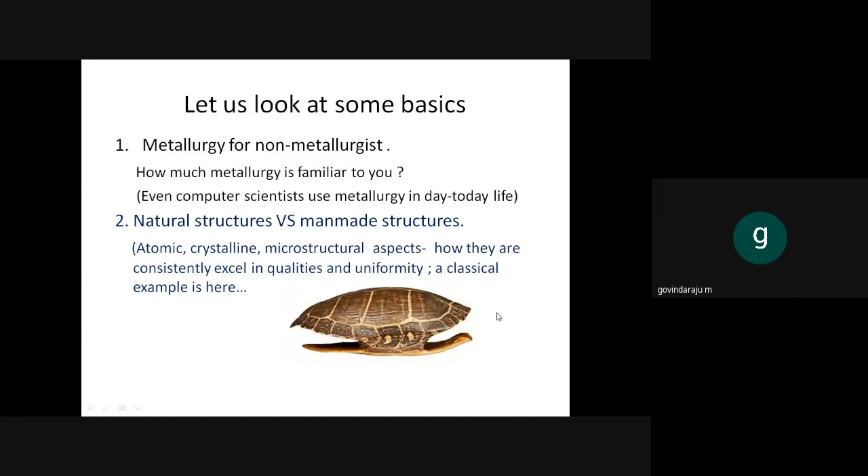If you look at them, for thousands of years they don't have any deviation in their properties, and their repetition is perfect. As these two are perfect, automatically their quality is perfect. Whereas, for example, if you make a material for an aircraft, composite or non-composite, 60% of the money is spent on testing. You have to make sure that every batch, every piece, every part is tested, proved, and clarified. If not, it is not fit for flying. Why so many irregularities? Because we have to start from the atomic level, and once perfection is attained, our material also will compete with natural materials.

And some of the words we might have seen, for example, in the last 15 or 20 years, everything used to be nanotechnology, nano-based. Let us start our research in nano, that used to be the buzzword. It's almost settled now. But is it anything new? Are we not using any nanomaterials? We are using nanomaterials in day-to-day life. You are using, I'm also using. So we will come to that: what nanomaterials do we use? Nanostructures, nano coatings. Is there any example right now?

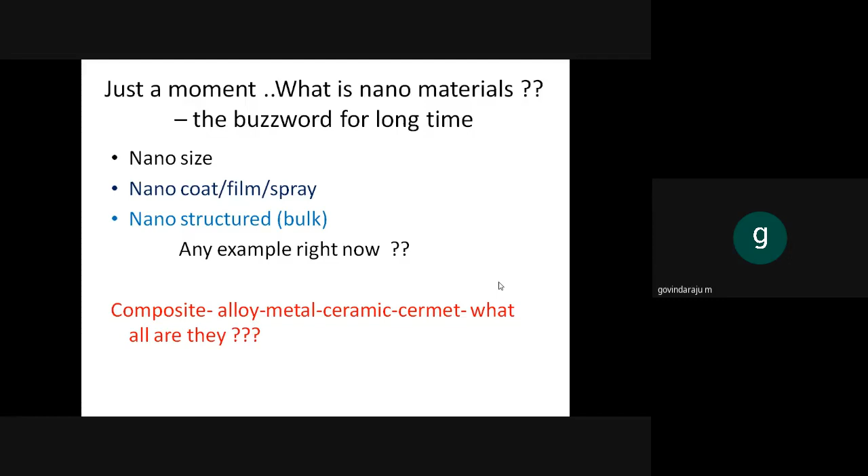Yes, take your SIM card or any electronic gadget. It has a nano coating, nano gold coating on the structure. Hope you know why it is gold coated and why it is nano gold. One is for a technical reason, another is for a commercial reason. Why it is nano size is for commercial reasons. So are we not using any composite or metallic ceramic? Yes, we are using. What exactly is a carbide tool? That also we'll see. A carbide tool doesn't mean it is only carbide. It is a composite, a perfect case study and example of a metal matrix composite.

A few more nanomaterials. Why are we talking about these particular materials? Because they are part and parcel of composites. When we talk about composites, we are talking about matrices and reinforcements. Sometimes we call reinforcements fibers, and we are not worried about fillers and other things for the time being. So let us talk about the matrix. Anyway, it is a large structure, we know it. And now let us talk about the fibers or reinforcement.

If you take just a simple example, a braided garden hose, which is available in most houses, not the plain polymer hose. You take a braided hose, you can see a bunch of glass fibers embedded in it. If you take out that bunch and take an individual glass fiber, that is near about nano size.

So where do we use glass in day-to-day life? We use mirror, that is silica based. And when you go for industrial glasses or glass fibers also, it is similar. There are some additives added to that, but the majority of the composition is still silica based. But did you ever think how to make a glass flexible? To some extent, it is ductile also. It's not as brittle as we see in home mirrors. How do you make that?

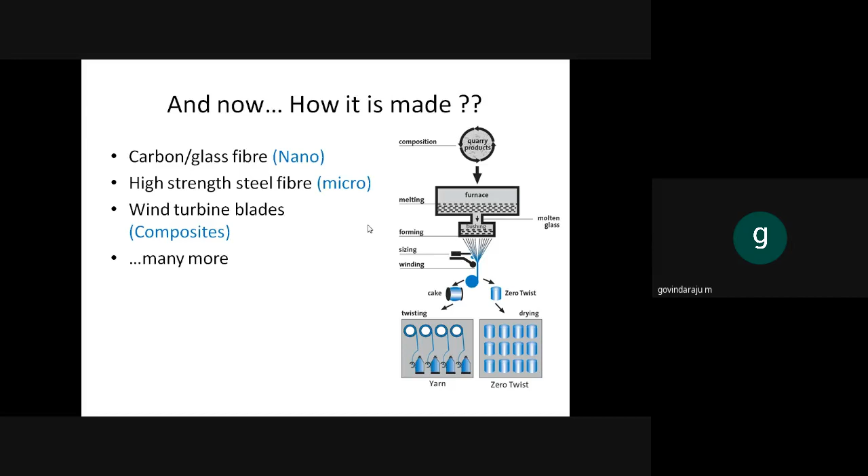Hope we are familiar with all these words like polymers, glass fibers, carbon fibers. We handle composites in day-to-day life many times. We handle metallics also many times. And some of the manufacturing we are yet to know, so we'll see those things. These are typical common examples of composites. I put mostly the metallic side, not the polymer side. There are few polymer examples.

One is the copper bottom vessel. You might have seen these in your home. A few stainless steel vessels are copper bottom, copper coated. There are a few questions on this. First, how do they put that copper bottom? What is the process of manufacturing? Second, why do you put copper? Third, why are stainless steel and copper separate? Why can't we make a copper stainless steel alloy? The work would be finished, is it not? Anyway, the aluminum conductor I just explained.

Teflon coated utensils. Though metallurgically Teflon coated items are not suitable for the Indian cooking style, since we overheat them, Teflon coated utensils, non-stick tawas, all non-stick utensils are another typical example of a composite. It's a metal polymer composite, is it not? A metal item is reinforced, the polymer is outside. Then, the nano gold coated SIM card.

Tinned copper wire. You might have seen some copper wire that, only at the edge, is gray in color. That is tin plated to avoid oxidation, only at the edges. If it is a long cable, a 1 kilometer cable, with the insulation, the copper cable itself is a composite. But at the end, it is tin coated.

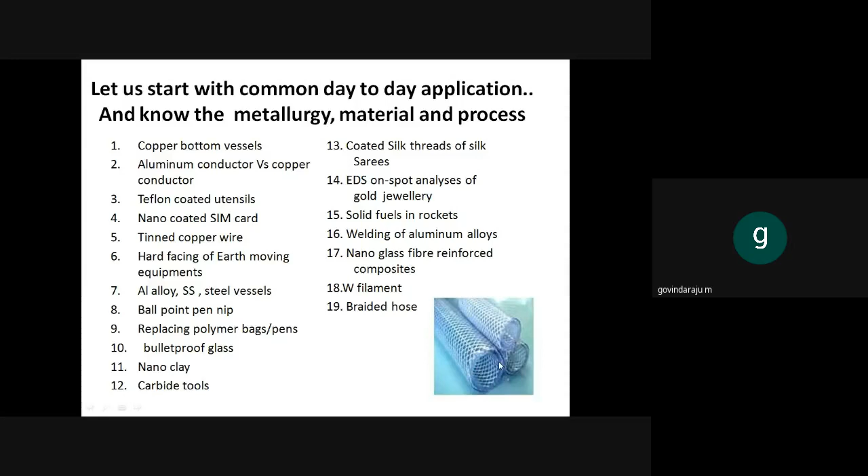Fuels, solid fuels in rockets. You might have seen when we launch satellites, there are 3-4 small solid rocket motors surrounding it. What is the fuel used? It's a solid fuel. What is that solid fuel? If time permits, please find that out. It is a metal combined with some polymer in a powder form. This is a slightly upgraded version of our firecrackers. These are examples. The last one is braided hose. This is what I was telling. Nano glass fibers. Okay.

And composites in the strategic sector, something like space, aerospace, nuclear. Where are they used? So these are a few words. We will try to learn 1 or 2 case studies. One is tungsten alloy. Hope we are aware of tungsten. It is used in filaments. Tungsten alloys are famous for very high density and very high temperature of application, but unfortunately in a controlled atmosphere. Superalloy. The name superalloy is a colloquial name. Superalloy means an alloy which can operate in any environment above 700 degrees. So naturally the application comes to aircraft engines.

Maraging steel. If you have not heard that word, if you see any satellite launch, particularly from the Indian side, on TV, or some of you might have witnessed it, the round structure that we see, what is that material? Forget about what is inside, what the fuel is and how the satellite is assembled. Only the pipe is made up of maraging steel. Okay, and superalloy I already told.

And another thing is titanium alloys. What do we use titanium alloy for? It is also for aircraft application. Titanium alloys are famous for lighter weight. For example, if we take any superalloy or any steel, the density is around 8 grams per centimeter cube, whereas titanium is just half of that.

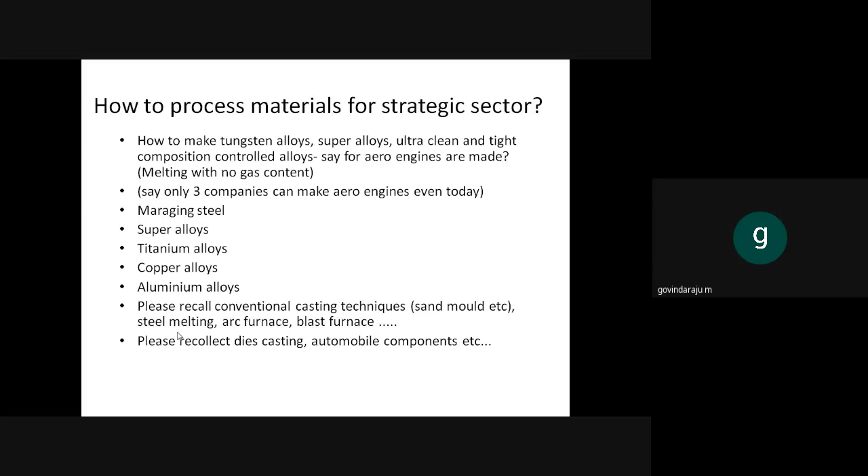It's 2021, June 1st. If you think that Boeing and Airbus make engines, no, they are aircraft manufacturers. So why can only 3 companies make them? Why don't we make it? Is there any company that makes a whole aero engine assembly in India? We are still struggling. Why? Simple, it is materials.

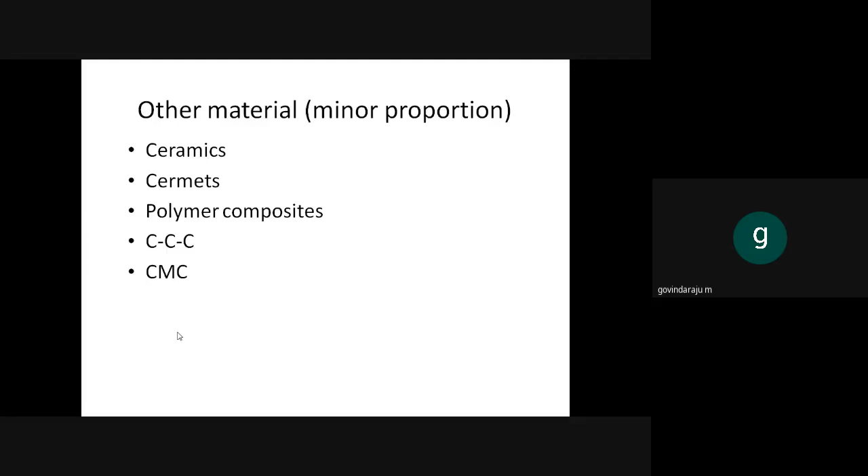Okay, so there are some other materials you have to remember. One is ceramics, another is cermet. Cermet is nothing but ceramic plus metal, so automatically it is a composite. And anyway, polymer composites you are aware of. And carbon-carbon composites, ceramic matrix composites. There are a few other composites. In 1.5 hours we can cover only this much.

Okay, so now with these questions, let us start the introduction. First, we should know about the materials. To know about the materials, we should know the classification of the materials. So first and foremost is metallic versus non-metallic. We classify the entire spectrum of materials into 2 things: metallic and non-metallic. In metallic we have metals, alloys, and certain composites. Examples of metals: silver, copper, aluminum, nickel, tin, pure gold, not the jewelry gold, pure gold.

Next is alloy. What is an example of an alloy? Stainless steel, brass, bronze. There are many. Metallic composites, yes. Is there any example of metallic composites? See, we should link to an advanced application. First of all, we should know the basics; then only will we be able to go for the advanced applications. Second, we should link everything to a material which is familiar to us and which we use at least once in a lifetime.

So, the metallic composite. Any example? Yes, a typical example is your carbide tool. Another typical example: if you take a mixie or DC motor powered item to a repair shop, they might have simply told you the carbon brushes are worn out. What is that carbon brush? Or on railway electric lines, which are always in zigzag, the pantograph is touching that power line. How much wear and tear is there, and what is the material used there? Those are all metallic composites.

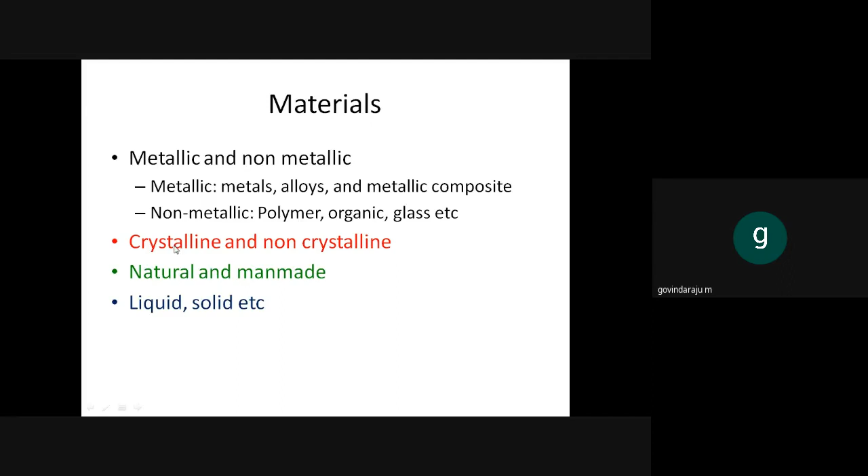So all the metallic and few non-metallic items are with unit cell. And here comes the main difference: crystalline means it must have unit cell, non-crystalline means there is no unit cell. Then it is time to learn what is unit cell.

So what is unit cell? Atoms arranged in a particular regular arrangement, that's what is unit cell. It's a regular arrangement, but it is the smallest possible regular arrangement, smallest size. That's what is FCC, BCC, HCP, all those things. So this is unit cell.

So here it is regularly arranged. Next will be next unit cell, like that, like that, like that. The entire spectrum of materials with unit cell - this is what is crystalline, and this is what is most of the metallics.

Then comes grain and grain boundary. All other things like inclusions, additions, etc., let us see later, including the phases. What is phase? So next is grain. So what is grain? What is grain size? What is grain boundary? We know what is atom, we know what is unit cell.

The thing is, if it is a crystalline material and if it is a metallic material, it is something like this - the atoms are arranged regularly. If it is a non-metal, unfortunately there is no such ordered microstructure; the atoms will be arranged in random manner, maybe in zigzag lines, a few lines like that. There is no regular arrangement like this.

Now we have to learn what is unit cell. Unit cell is nothing but some combination of atoms, and next is grain. Grain is nothing but the combination of unit cells with the same orientation. That means this is one unit cell, next will be here, next will be here, and this is the orientation.

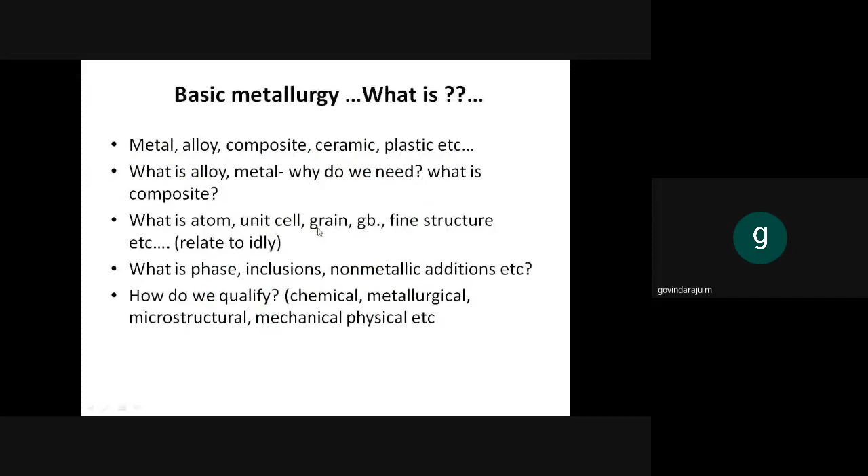So now we know atom, unit cell, grain boundary, phase, all these things. So why are we learning these things? These are all very important for understanding metallic composites. So now we have seen alloy and alloy microstructure, and this is a microstructure which I have shown. Now let us come to this microstructure.

Now, this is one phase. The grays may be alpha and the blacks may be beta. It's an assumption—any two phases, alpha-beta or alpha-theta, some two phases. That's why this color difference. Now you know what is alpha and what is beta. For example, this is also, I think, alpha and Fe3C maybe.

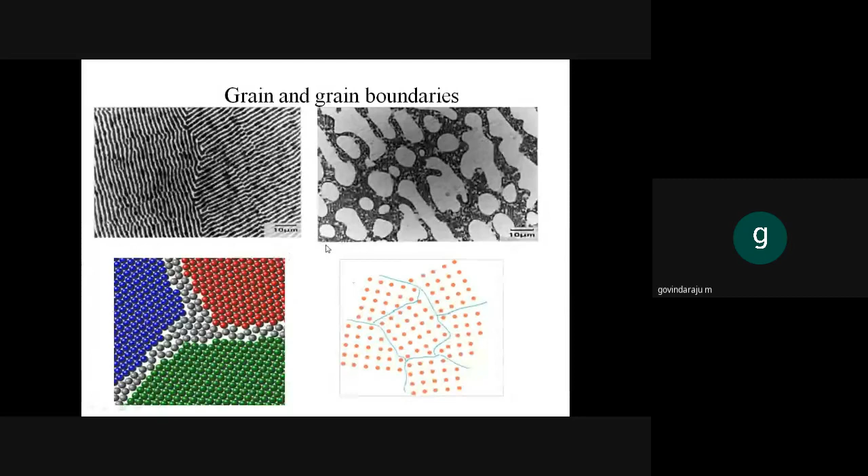So different structures, grains are oriented in a different manner. You can see spherical, lathe-like, longitudinal, irregular, regular, small size, big size. These are all variations. But what is common is phase, atoms, unit cells, alpha, beta, etc. So this is the basics about materials, metals and alloys, and certain composites, and these are other microstructures—brass, bronze, etc.—only for understanding.

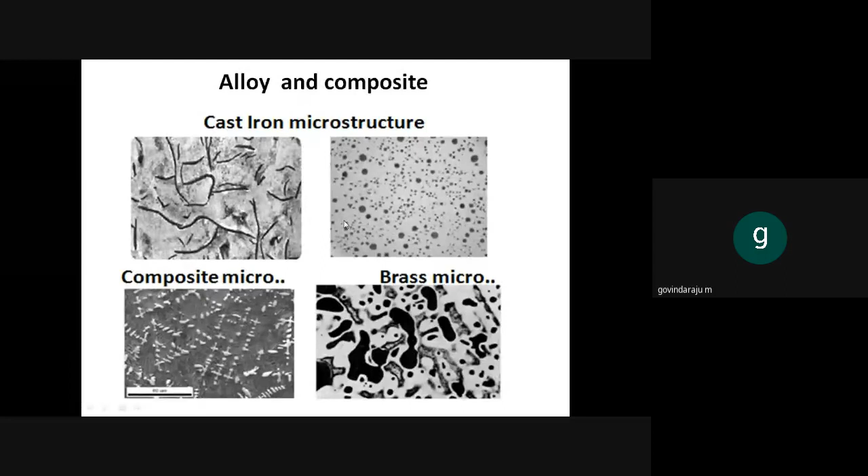Now, before going into composites, let us learn how we make metallic materials.

First of all, metals are extracted—let us not go deep into this. After extraction, if it is a metal or alloy, both are cast. Why is it cast? That's what gives us the shape. As a mechanical engineer, you know the sequence: casting, machining, forming, welding. Where do we stop with casting—engines, like. Where do we stop with machining—precision parts. Where do we need forming—shapes, whenever we need shapes we need forming. And why do we need welding? You know that, so these are all familiar.

Now there are certain other processes which should be familiar. First is powder metallurgy, so PMS, powder metallurgy. Other things are chemical vapor deposition, physical vapor deposition, stir casting—these are all just words. Among these, let us look only at powder metallurgy.

These others are only for self study—chemical vapor deposition, physical vapor deposition. If you cannot make a certain material using the usual route—casting, machining, forming, welding—then you have to look at alternative processes. One alternative process is powder metallurgy. One example for powder metallurgy is tungsten powder.

What is tungsten? A high temperature and high density metal. What is its melting point? It is 3400 something, so we cannot do casting. Why? Because most casting operations are carried out below 2000 degrees Celsius. When you want to do casting, we know we need a mold, we need a crucible. I told you alloy making is like coffee making—when you make coffee, you need a vessel to support it.

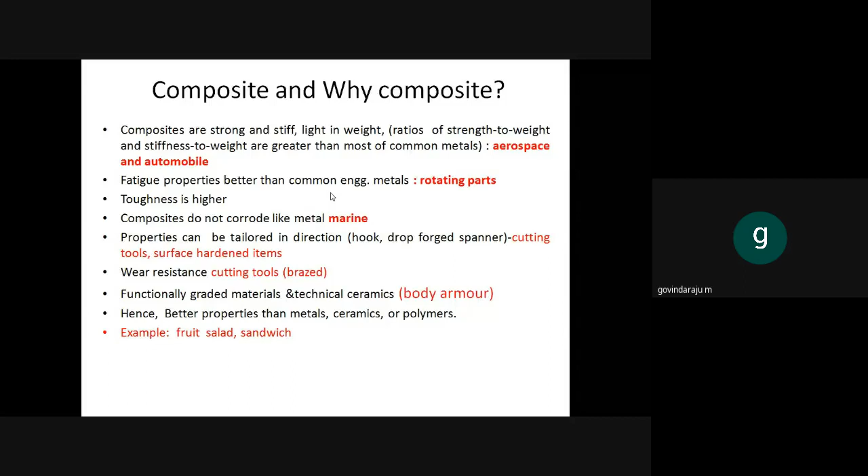Whereas if you make a silver copper alloy, or steel, can you separate the silver and copper once it is made into an alloy? No. Can you separate the carbon from iron? No. That is inseparable. That is a homogeneous mixture, a solid solution. Whereas a composite can be separated. Something like RCC, you can break it open and separate your steel, cement, all these things. Another thing, when you make an alloy, the individual metallic properties are changed. We are getting a new property. Whereas in a composite, the individual constituent properties are retained and we get a combination of those properties.

So now structure-wise, this is an alloy. We have already seen it. Composite means it will be like this. It is only touching each other. Physical mixture, physically distinct. And there is one more word left out. Ceramics are compounds. What is a compound? For example, take any ceramic, aluminum oxide, or any other crystalline compound, salt, let us take NaCl. This structure will be like this. You can see the difference. In an alloy, it is a mixture and the unit cell is homogeneous, but there is some randomness. Here, they are perfectly separate from each other. Whereas in a compound, at the unit cell level itself, it will be a fixed composition and perfect.

I told you a few minutes back what a phase is. Let us say iron and carbon. Pure iron is alpha phase. Iron with 0.1% carbon is also alpha, and that is steel. Iron with 0.2% carbon is also alpha, and that is also steel, up to a certain limit. What is that limit? That is the solubility limit. Up to that solubility, it is always alpha, always an alloy. An alloy can have various compositions: 0.1% carbon, 0.2%, 0.05%, anything. That is the randomness. That is an alloy. Whereas in a compound, it cannot be. And the structure will be like this.

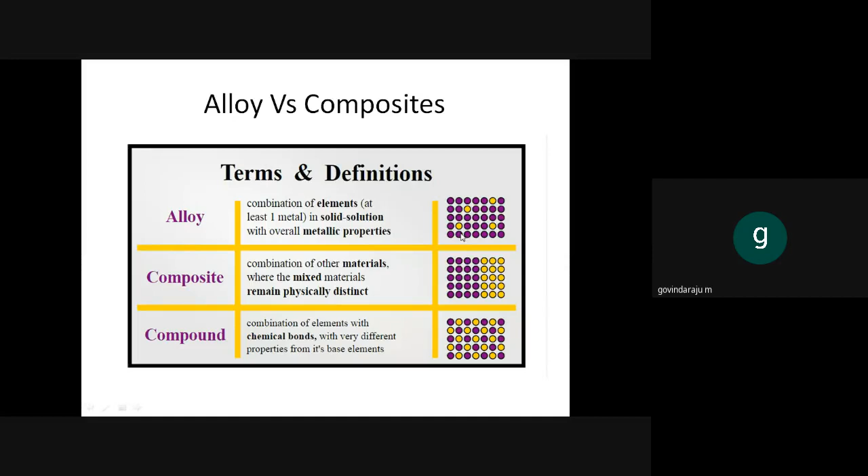Let us go back to the atomic level, like this alloy. When you heat it, these atoms will move here, that atom will move there, all the atoms will be jumping here and there. That's what diffusion is. Now, in this case, between the cobalt powder particles, there will be a lot of diffusion. That means all the cobalt powders will combine and make a single piece.

Now, there will be wetting between this tungsten carbide and cobalt. What is wetting? If you put a drop of water on the floor, that will wet. If you put a drop of water on glass, that will not wet, is it not? But here it will be wetting. That means there is a small thickness of liquid cobalt layer surrounding this.

Now, this cobalt is a single piece, all joined together due to the diffusion and heat; you assume that it is partially melted also. And there is nice wetting between this and this. So all are joined together and kept together. After the sintering step, you cool the product. You got a tungsten carbide tool, as simple as that. This is what a composite is.

Now assume cobalt is kept the same. Instead of this tungsten carbide, you are keeping another powder, let us say silver powder or nickel powder or tin powder. We are heating to, let us say, 1000 degrees Celsius. What will happen to cobalt? Nothing. Only diffusion will happen. It will not melt. Why? Its melting point is 1500.

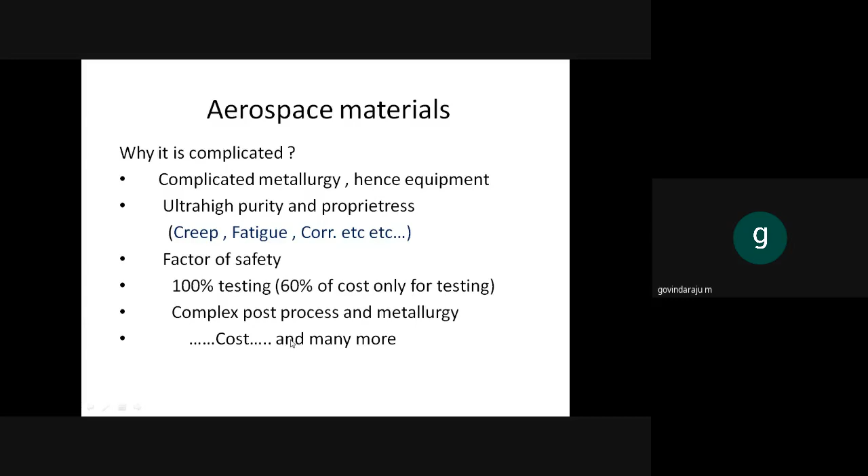Number two, to maintain such tight properties with such a low factor of safety, you can imagine how stringent the rules are in the material properties and testing of the material. That's why I said if the material costs 100 rupees for aircraft application, 40 rupees is the material cost and 60 rupees is the testing cost. And they are processed with complex metallurgy. One of the complexities I mentioned is atmosphere. Other complexities we'll look at if time permits.

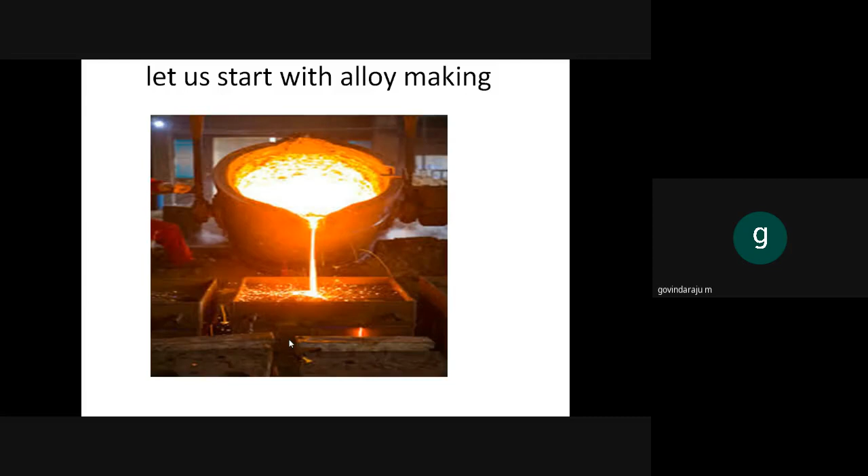Next is, sorry, where is that? After alloying, it is forming and welding and machining, etc. For which application it is done, for forming, etc. That also we are not going deep into. We know that. For example, any long section.

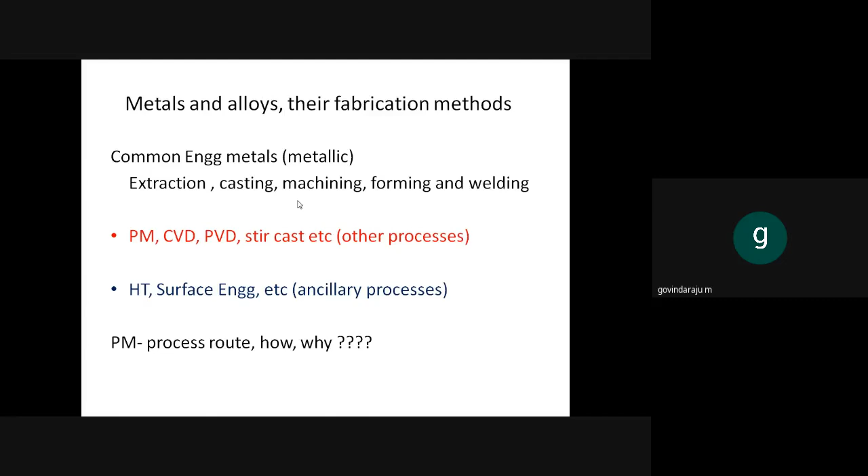For example, let us take an aircraft. Its fuselage, all long structures. Most of the things are made up of aluminum alloy. You know that aluminum alloy should be made into a long product. In that there is a trick. The aluminum alloy cannot itself withstand that much high strength. So there are titanium fibers and titanium pieces embedded in it. So naturally it is a composite. We'll come to that later.

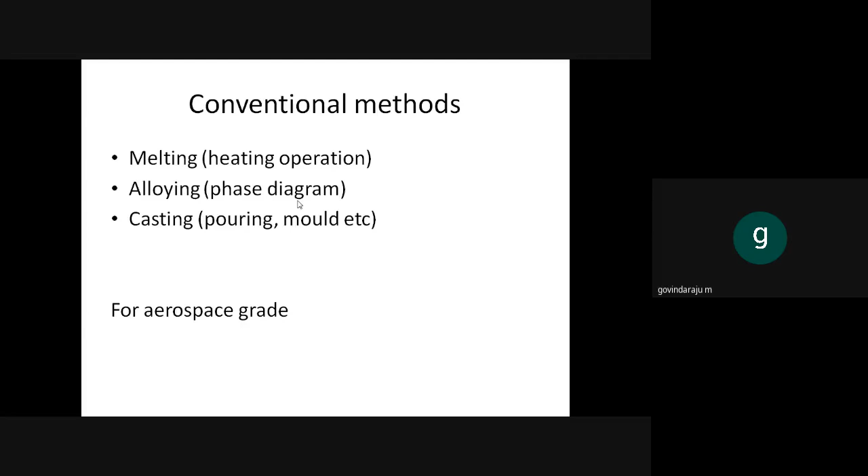Yes. In alloying itself, if it is for aerospace or an application which is high temperature, for example, this is the composition of a superalloy. What is a superalloy? I told you a few minutes back, it is used in aircraft engines. And why do we use superalloy? That is the only alloy which can take temperature as high as 700 plus. And a material should withstand that temperature continuously for a few hours, which is why this alloy is developed. We are not going deep into how the alloy is developed, but this is the composition.

You can imagine nickel, chromium, iron, molybdenum. Just look at it. This is 1500 degree melting temperature. This is something like 2000 degree melting temperature. You cannot melt it in air. Iron, we know it. Niobium, 2000 plus. And this also cannot be heated in air. Molybdenum, it is 2800 degrees. Titanium 1700 degrees. Aluminium 660 degrees Celsius. Cobalt, carbon, manganese, silicon, phosphorus, sulfur, boron, all these things are there.

If you do a simple casting like this for this alloy, that's all. There are some 13 different elements. Each one needs a different crucible and different atmosphere. How to make it? And just see the composition. You have to maintain a tight composition. For example, I'll give only one example, aluminium. Here it is given. This is a textbook range, 0.2 to 0.8. But let us say people will stick to only maybe 0.6%. Let us assume everybody will use only 0.6%.

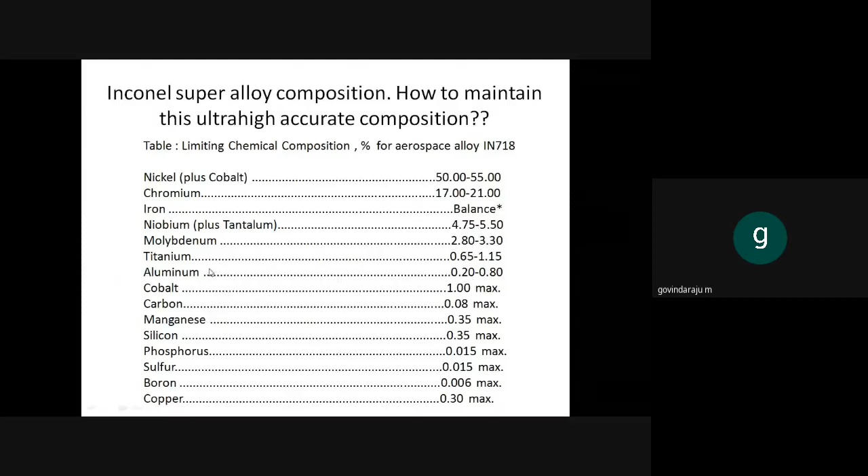Then you have to melt it. After melting it, testing it. During melting also, people will test half the way, make sure that composition is available. Then maintain this composition, obtain the property. Do you think it is easy? This operation is carried out completely inside a vacuum. That furnace is called vacuum induction melting furnace. So that's why this material, which is used in aerospace, is very difficult. We are not able to make an alloy for these engines.

And yes, this is a typical picture of a furnace which is used to melt the aerospace alloys. That is the vacuum induction melting furnace. This is the chamber, stainless steel chamber with the door. After closing the door, if you switch on the pumps, the air inside will be completely removed. So it becomes vacuum. Only then is the melting carried out. For the melting, we need a heating setup, that is the induction.

Hope you know the induction principle, something like the induction cooker we use at home. Same thing, but very high temperature capability. The white colored one is the crucible. Whatever you want to add, you can melt it. After melting, you get casting inside itself, and you can imagine the quality.

The thing is, everything is closed. How difficult it is to maintain this composition. If everything is open, you can do something about it - that's number one. Number two, when your operation is carried out like this, the cost will jump like anything, is it not? And number three, just look at this complexity. If steel can be made into 200 ton, 300 ton batches, these kinds of alloys can be made into only 2 to 3 tons. Size limitation is there. Why are these many complexities there?

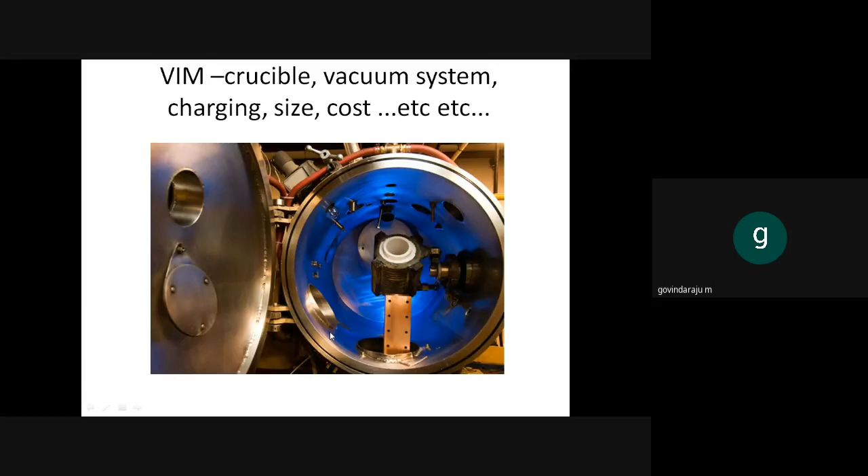So these are the difficulties in vacuum processing. After making the alloy, is our headache over? No, not like that. You know what this is? This is a casting microstructure with chill grains on the edge, columnar grains, then equiaxed grains in the center. You might have read this.

This cannot be used in aircraft. It has to be made homogeneous. The only way of making such a uniform structure, which is looking like the one on the right side, is by forging it. So to make the microstructure uniform, forging is a must step. You cannot avoid that. We know what forging is.

After all the forging and machining, all the things are done, you achieve the property. Heat treatment is also a must. Can we use that alloy as such? No, still not possible. We have to make it into a composite.

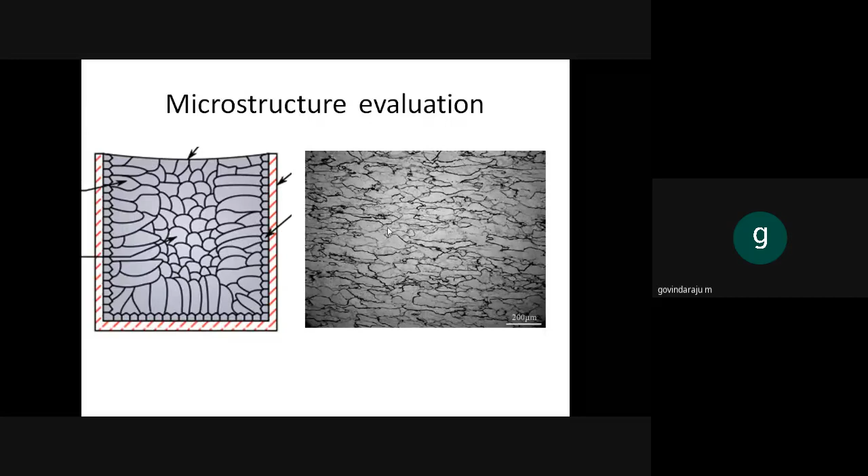What is that composite? For example, this is an aircraft engine, and there are turbine blades inside - compressor blades and turbine blades. Let us talk about only the blades which are at the high temperature combustion area. We know the alloy - what is that alloy? This is the alloy, the super alloy.

We melted it. What are all the difficulties? And we made the structure uniform, and we did the heat treatment also. Still, this cannot be used because the temperature inside can reach up to 1100 degrees Celsius. That alloy cannot withstand 1100 degrees Celsius. Then what do we do?

This is the thing we are doing. This is the material used in aircraft, the super alloy. This super alloy is oxidized purposefully. What will happen? There will be an oxide layer, and that is called thermally grown oxide, TGO, as written here. Only a thin layer will be oxidized. Then above that oxide, there is a zirconium oxide coating.

This is a typical example of a composite: the alloy, then there are two coatings, and above that, there is a composite coating - sorry, above that there is a ceramic coating. Now the thing is, it is something like gears working together.

The temperature above that region is 1100 degrees Celsius, which cannot be withstood by the superalloy. So we make a ceramic coating. What is ceramic? I explained earlier - ceramic can withstand very high temperature, but unfortunately ceramic cannot have any ductility. So let the ductility be taken care of by the superalloy, and let the high temperature characteristics be taken care of by the ceramic.

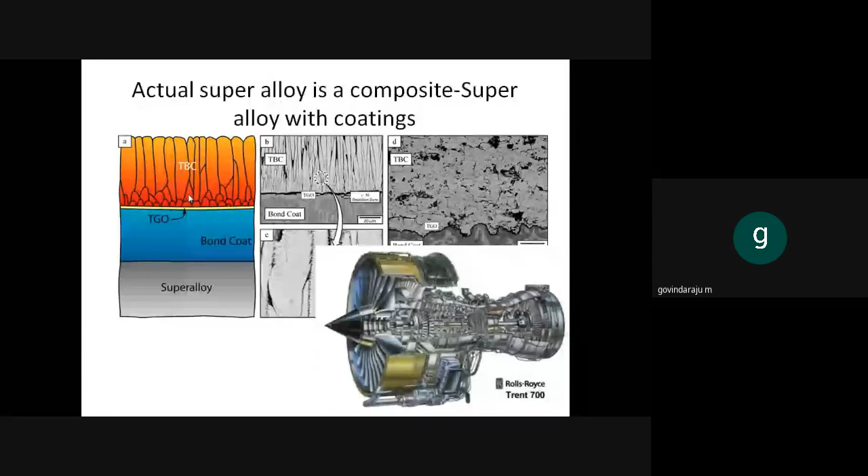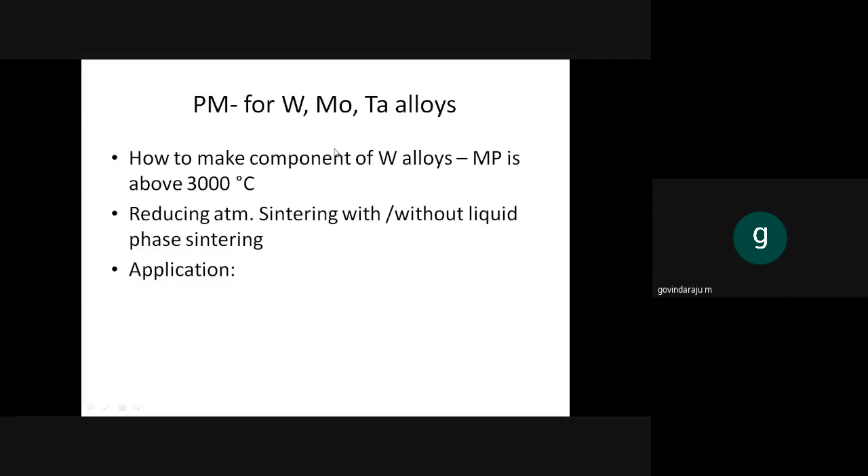Let us see another typical example of a composite. You might have seen a few manned missions for space, and when we return, some of the manned missions used to get dropped on the earth. When it's getting dropped, it should absorb a lot of energy, and the material should be accordingly designed for that.

So the typical example for a high strength material that is also ultra lightweight - not just lightweight, ultra lightweight - is called honeycomb structures. It is nothing but taking a sheet metal. Just after the lecture, you can open it up - many videos are available on honeycomb structure. This is used in crash-proof vehicles also.

I am explaining this using a metallic material, but there are similar things in polymers also. Take a honeycomb structure with a certain thickness - from the picture, I can assume this thickness is something like 10-15 mm, and this is something like 1 foot by 1 foot. This is made up of a superalloy, IN718, which we explained previously.

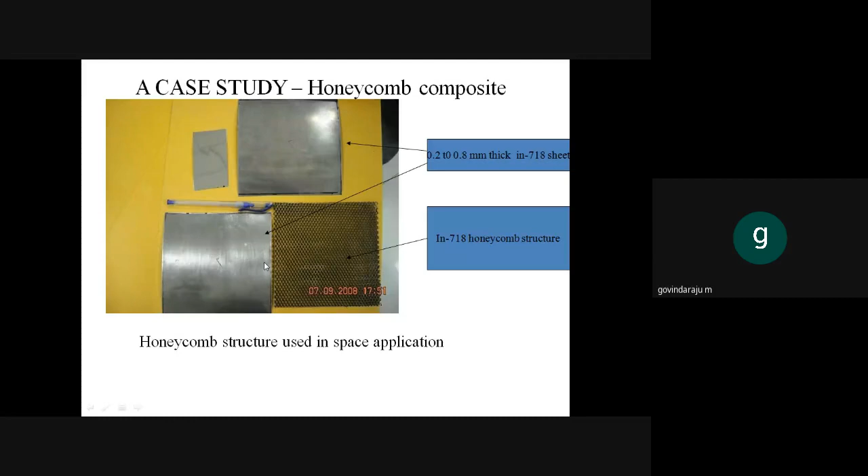So we take this honeycomb structure. Above and below, we take the same material - 2 sheets. Now combine the 2 sheets like this - there is a bottom sheet, then this honeycomb structure, and a top sheet. After combination, we can see the honeycomb structure visible in between.

After combining, you join it. Now the honeycomb is made - you can see the middle is honeycomb, and the top and bottom sheets are combined together. How is it combined? There is a welding process called brazing. Please remember this word, brazing.

Brazing is nothing but keeping another low melting metal foil here, and heating the whole combination above the melting point of this foil but below the melting point of this structure. What will happen? The foil will melt - since it's only a little amount, it will form a bond between these structures, a metallic bond. So we made this honeycomb structure.

This is a typical example. This is lighter than water as a whole - why? There are a lot of gaps, you see. 90% is gap, only 10% is material, but the strength will be near equal to a solid structure. This is one of the great inventions by a few scientists, the honeycomb structure, and it is now being used in automobiles also.

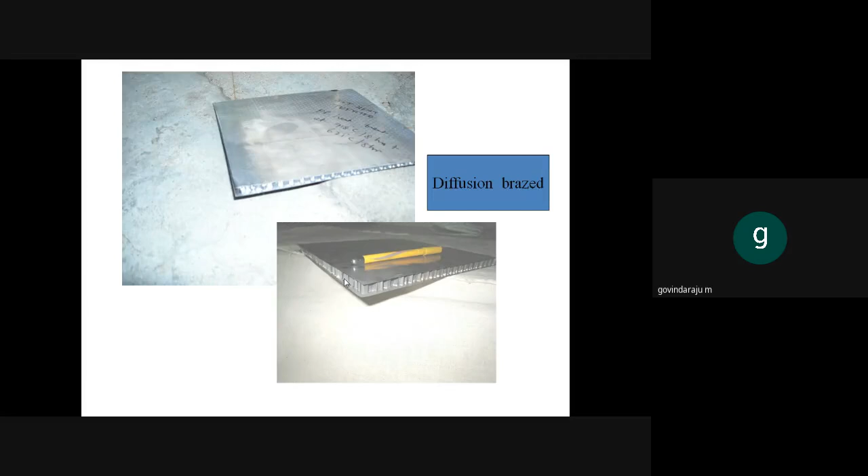So this is another case study. What are the case studies we have seen? Engine material, tool, honeycomb structure. Any other case studies?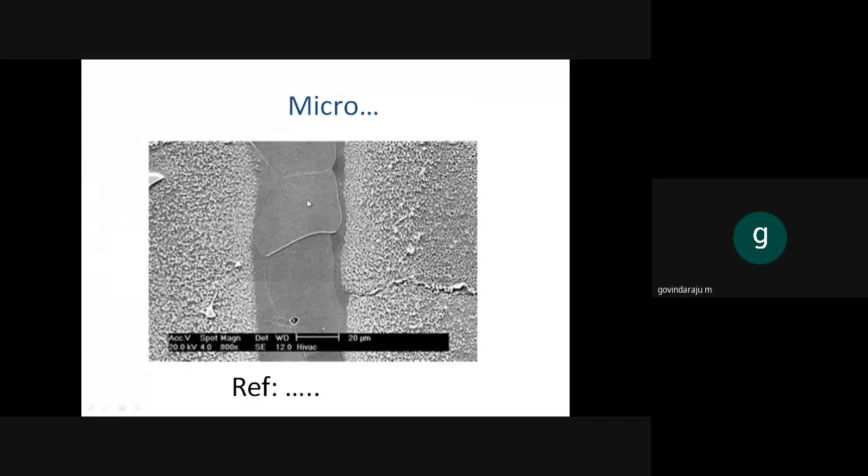So let us go back and see the last topic for the day.

Whenever you see an aircraft, you might have seen thousands of riveted joints on the aluminum body. I told you that the aluminum body is embedded with titanium fibers for high strength - it is not an alloy. You might ask, why is titanium high strength and aluminum low strength but lightweight? So if you make an alloy, can't we make a structure that survives? No, not like that - it must be a composite only.

Why can't we make an alloy? Once you make an alloy, we know that certain properties will be lost. We need lightweight and ductile aluminum alloy, and we need high strength titanium alloy - if you make them separately, we need both. When we make it a composite, both properties are retained - we need ductility, we need lightweight, we need high strength, all these properties are retained. But if you make an alloy among these two, it will become high strength but unfortunately brittle. Okay, so let's leave that topic there.

Let us come back only to the aluminum alloy structure. The aerospace material is only one particular type of aluminum alloy, that is aluminum-copper alloy. Let me explain from here. Consider this is a phase diagram - a temperature versus composition diagram. Here it is explained with the help of copper and silver. So aluminum-copper for aircraft application is 95.5% aluminum, 4.5% copper. In industry it is called duralumin.

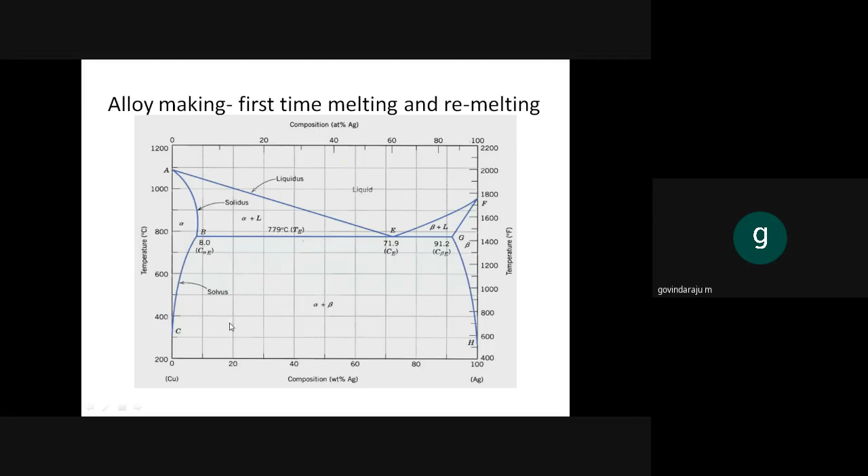So alpha and theta will be there in aluminum. Let us go to that aluminum. Yes, this is alpha and this is theta. Hope you are aware about the phase diagrams and solubility limit, alpha, single phase, multi-phase, etc.

How are we made this? How do we make this alloy? First step is alloy making, I told you already. You have to make aluminum and copper as an alloy. And why pure aluminum cannot be used? We don't have sufficient strength. We have seen in the first few slides, alloy is made only to make high strength.

And why only 4.5% copper? Number one, density. Number two, if you keep on increasing copper percentage, ductility will be lost. So we need a strength in a particular manner. So we are adding copper.

We are making alloy. I told you after making alloy, you have to do forging. Why? Making uniform microstructure. After forging, it is made into required shape, maybe thin sections, round pieces, square pieces, X, Y, Z, whatever you want, you make it. If you want any forming, drilling, sheet metal, whatever you do it. That is, you know it already.

But the thing is, how are we getting high strength in it? Just look at it here. This is a typical casting. The last picture is something like typical casting. What all are they? One is alpha.

Alpha is nothing but certain percentage of copper is dissolved in aluminum. And there is a theta. It's a two-phase alloy, is it not? Alpha and theta are there. Theta is nothing but it is a compound Al2Cu something or CuAl2. There is a compound theta.

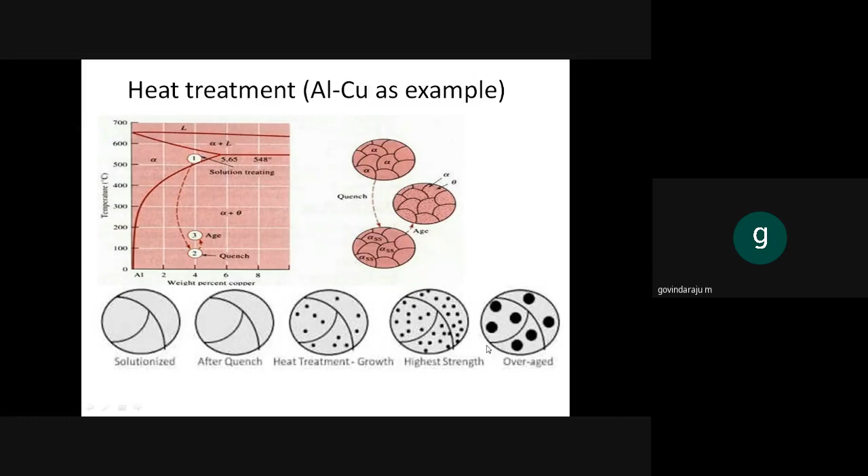What is the strength of this? I told you already, only 100 megapascal. So the entire portion is 400 megapascal, only near the weld it is 100 megapascal. Can we use it in aircraft? Impossible. It will collapse. So this is the reason why we are not able to make an aircraft structure by welding. This is the actual reason for aluminum alloys. People will say aluminum alloy is not weldable. Why? There are 4 or 5 reasons. One among them, the metallurgical reason, is this one. If you weld it, you will not get the structure and the properties we obtained.

But is there any solution? Imagine we have to weld it anyway, no other choice. Yes, we can do it. Weld it first, then heat it. Don't do the heat treatment first. Then you can again ask, why is nobody in the world able to make it like that? Let aircraft manufacturers weld it and heat it. Why is nobody doing it up to now? It's not that simple.

Because there is no furnace in the world which can heat something the size of an aircraft. Very, very difficult. You will not get uniformity. And once the structure is made, if you do heat treatment, that's all. Mechanically, you know it. There are thousands of stresses, bends, deviations, uniform, non-uniform, X, Y, Z. So finally, you have to scrap it. Is it not?

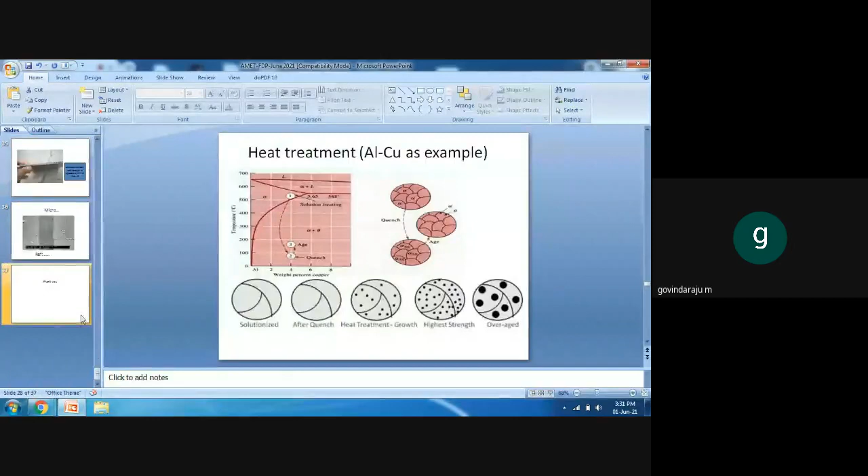Okay. So for the time being, I'm stopping this. If you have any doubt, you can switch on your mic, and I'll be online until all your doubts are clarified. And if someone is working in metal matrix composites, ceramic composites, cermets, etc., or like I told you, why electronic gadgets are coated with nano gold and how that nano gold is there, there are hints in the PPT itself, PVD, CVD. For all those things you can always contact me by mail.

So as organizer, is anybody online? Vijay? Sir, good afternoon, sir. Good afternoon. So anybody who has a doubt, you can ask.

Sir, only one thing. I am working on aluminum metal matrix composite. Okay. In polymer, my friends are reinforcing steel with epoxy. Are you reinforcing steel with epoxy or epoxy with steel? They are doing hand layup only, sir. They place a layer of resin, then the steel mesh, then another layer, changing orientation. Can we do like that in aluminum metal matrix, sir?